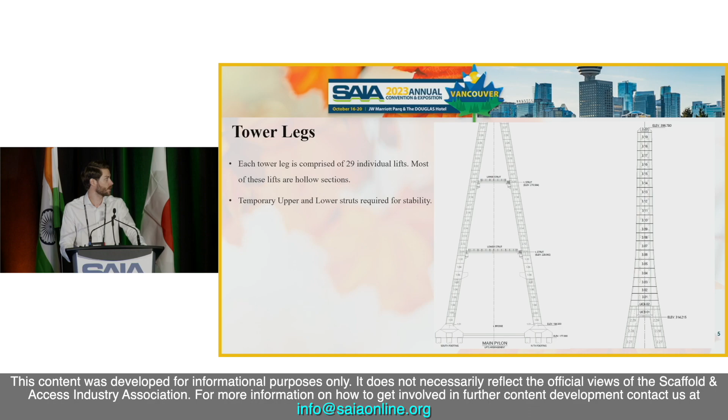So as you could imagine with the bridge, the tower has given us the most significant access challenge. You can see here on the right-hand side, we've got the lower portion, which we call the tower legs. It comes with about 29 lifts of concrete, and then we've basically transitioned to the pylon head there for another 22 lifts. Most of the lifts are hollow in the pylon head. It's all steel anchor boxes, we call them, which is where the cable stays are anchored to the tower. And you'll also notice on the left-hand figure there, we've got what we call the temporary struts. Those basically just prevent the legs from falling in on each other.

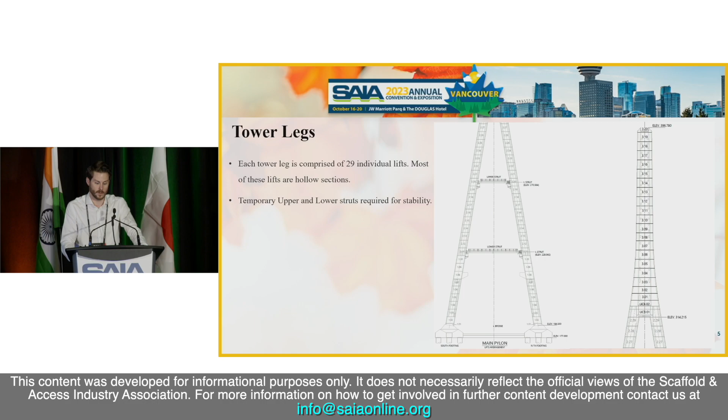On the U.S. side, it'll be 720 feet tall. So in the city of Windsor, it will be the tallest structure by far. And in the Detroit area, if anybody's familiar with Detroit, there's the Renaissance Center along the water, which is a pretty significant monument in the city of Detroit. The tallest building is also exactly 720 feet tall, so they are the exact same height.

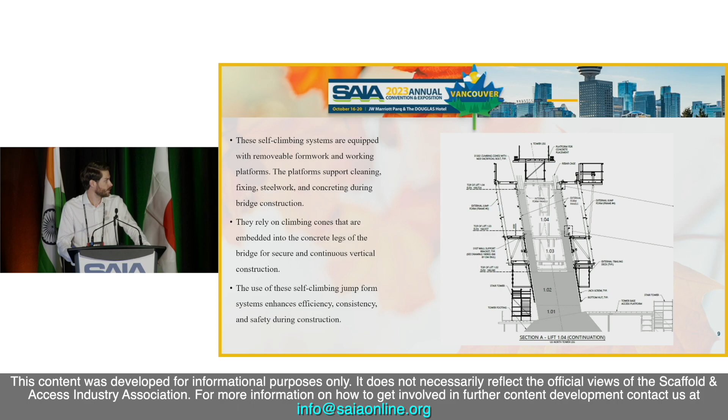So these things were designed and fabricated in Australia by OM Engineering. They've been great to work with. And you'll notice here, we had a unique challenge where we had independent and separate jump forms for each tower leg, which you can see on the right photos.

And then once we reached what we call the crotch of the tower at the top of the legs, that's where we had to merge the jump form. So there's a lot of steel work involved there in order to do that. But we got it done, and it worked out well. So these jump forms provide a very significant access point to where the majority of the work's going on in the towers. So we've got a bit of a video here. I'll show you some drone footage of the jump forms over the years.

How does it jump? So there's jacks basically all on the bottom, and they grab onto a threaded rod that's hooked onto some embeds in the concrete, and it basically jacks on the threaded rod and pulls it up, and then you replace those on the top of the next lift once it's cast with concrete, and just on and on. Yeah.

How much time for one pylon all the way? I was wondering how much time it took from the start of the pylon to, you said the U.S. side was completed. Yeah. So we installed the jump forms on the U.S. side in February, must have been 2021. And they just finished last month. So almost 3 years? Getting close, 2.5. Yeah.

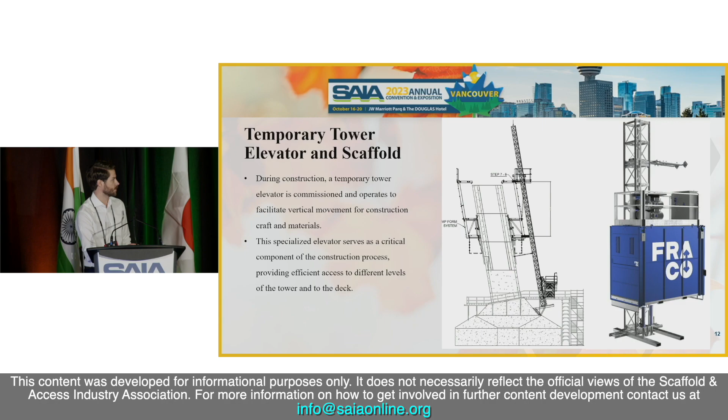So they provided the temporary elevator for us, and there's a few unique items related to this elevator in our tower that are of note. This particular elevator is Fraco's SEH model, and it's got, I think, 6,000 pound capacity, which is about 30 people. So it's pretty big.

And you can see here, one of the questions I believe from Eric was just how much this thing jumps, or how long the tower's taken. And we talked about this thing jumping automatically. So as you can imagine, the elevator and the mast are going to be stationary.

And as this jump form jumps and begins to move up, we've got what Fraco's design calls rolling ties, which is a very unique and cool feature. So basically it ties the elevator to the jump form and locks up. And then we'll move to this one here. This is a little bit of a shot on the rolling ties.

Once the tower jump forms are done jumping, we basically lock the rolling ties and continue to extend the elevator and move on to the next lift. So it's all pretty standardized, and the sequence, obviously at this point, U.S. tower's done, but Canadian side, we're cruising along, and everything's moving along very, very smoothly. So just go back here for a second.

The elevator does land at the very top of the jump forms. So that's the top landing, and obviously once the tower's complete, it will land at the top platform. But there are 3 other landings, including the actual bottom and base. We also have a landing at the deck level, and then there's also one at the crotch where we've got what we call platform 5. So that's one of the items that'll be coming up as well.

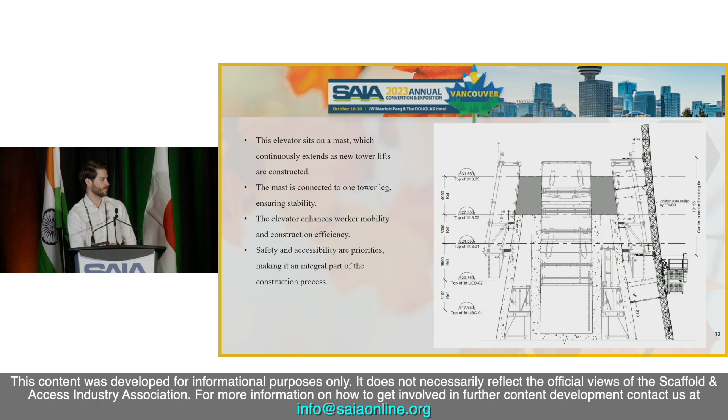One of the other unique design features that we took advantage of on the Canadian side, at least, was integrating our concrete slick line into the elevator mast. So one of the questions that I get a lot is, how do you get the concrete up to the top of the tower, right?

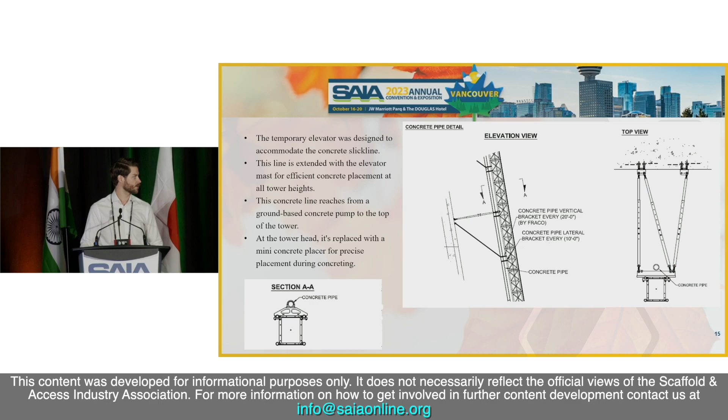So in this case, on both sides, we've got a massive stationary pump that's at ground level. It's got a hopper, concrete trucks just back in, unload the concrete into the hopper, and then this pump pumps the concrete all the way up through this concrete pipe, and it gets distributed into the particular lift with what we call a mini placer. It's like a reciprocating arm. But on the Canadian side, we were able to integrate the concrete pipe into the actual elevator mast, which is pretty unique.

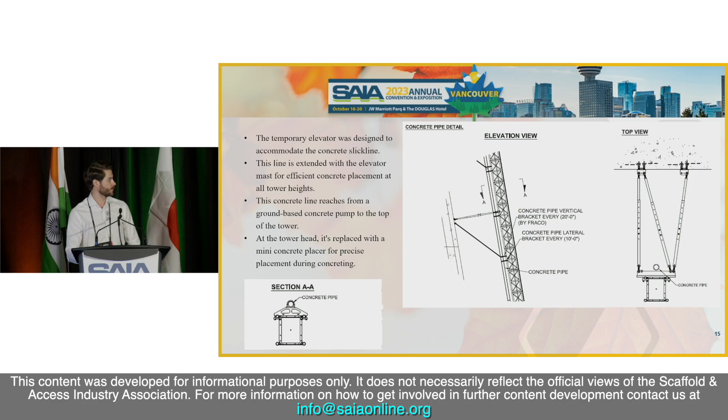So I've got another video here which will show you a little bit more on the elevators. So it's similar, it's just not integrated with the elevator itself. So they had to do separate embedments, separate ties from the concrete pipe right to the tower. So it's completely independent of the mast, but very similar concept. We were just able to utilize the mast itself for support, which made it a little bit more efficient.

This is work. Hey, I'm sorry. You mentioned the crotch a couple of times. That's where the two legs come together? Yeah, the crotch. The crotch, okay. Yeah, I thought that's where the legs come together. That's right. Well, the formwork kind of crashes into each other right there. That's true. It does crash into each other as well.

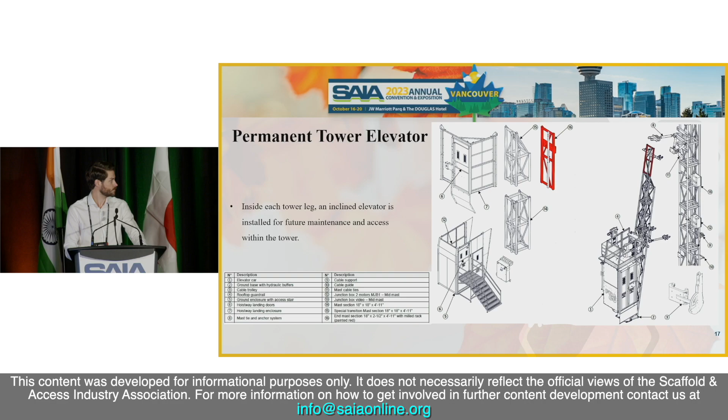So there are a number of different platforms in the pylon head. The elevator will only stop at the second from top, which is where the last cable stay is, and also at the very first cable stay, and then obviously at the bottom too. So there are only basically 3 landing spots for the vertical elevator as well.

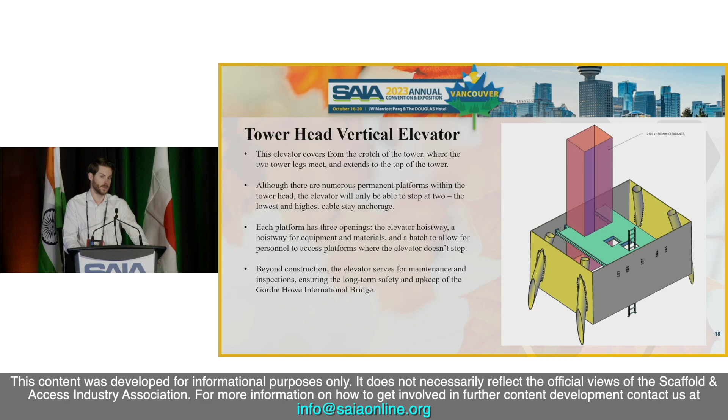There's like a little overhead crane at the top of the tower that'll always be there, and people will be able to bring materials up to each level through that access hatch.

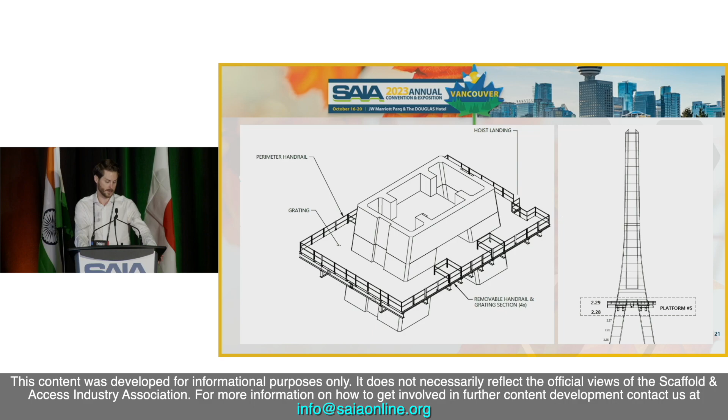So here's a little bit more of a figure on the platform 5. It does provide access around the entire tower system, in between the legs as well and around. So like I said, this provides critical access and material storage for the stay cables. All the good things are up there, the sea cans, and obviously the important porta-johns.

So I've got another video here. It gives you a little bit of a better view on the platform 5, and I think at the end it'll have the scaffolding and the mast climber there.

One of the questions I have is that red platform there, that looks like it's just made of structural steel? Yeah, that's right. Okay.

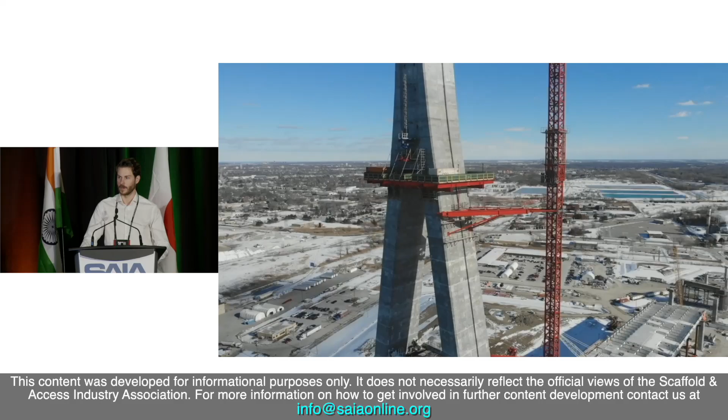And Jay, did you have a team that was working on the U.S. and the Canadian side, or how did that dynamic work between Canada and the U.S., building a bridge together between two different countries? Yeah, that's a great question. We basically do have 2 separate teams. Obviously, the bridge is more or less symmetrical, so we do work very closely together, of course. But we do have different engineers from across the world, especially our lead engineers, that have different opinions and different preferences and things like that. So we do things slightly different depending on what's going on.

But yeah, there's one team on the U.S. side, one on the Canadian side. Myself personally, because I'm in the office, I run all the office stuff in the engineering department. I cover both bridges, U.S. and Canadian. But as it relates to the construction teams, they are separate.

And who was doing the construction on the U.S. side and who's doing the construction on the Canadian side? So we've got a bit of a unique setup.

The joint venture general contractor that's designing, building, and ultimately delivering the project is called Bridging North America, which is a joint venture between Fluor, Dragados, and Aecon. On the Canadian side, we're BNA Canada, BNA Constructors Canada, GP. On the U.S. side, it's BNA US JV. Basically, we're all Bridging North America.

All the employees are hired and employed by the three parent companies, but technically BNA US JV is a subcontractor to BNA Canada, so they basically run all their stuff through BNA Canada. The headquarters—our project director and all the lead staff, our senior leadership team—is located in Canada. But on the bridge team at least, we're self-performing most of the work, so very little of it is actually subcontracted out for the actual work on site.

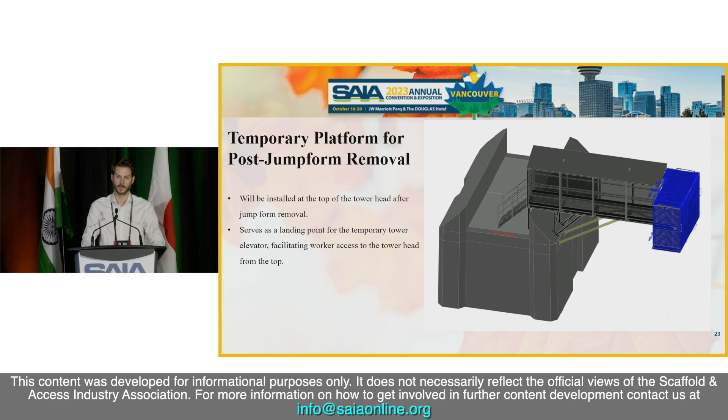For some of the other segments, like the ports of entry, the large majority is subcontracted. The U.S. port of entry is completely subcontracted, and same with the Canadian port of entry. The I-75 portion is more self-performed, similar to the bridge. But the bridge team does self-perform the large majority of the work.

I mentioned in one of the pictures, it also showed the very, very top of the tower platform. The picture at the time showed the completion of the U.S. tower, so this is the design for that. This is where the temporary elevator will also land. The U.S. side has it complete, and the Canadian side will have it soon.

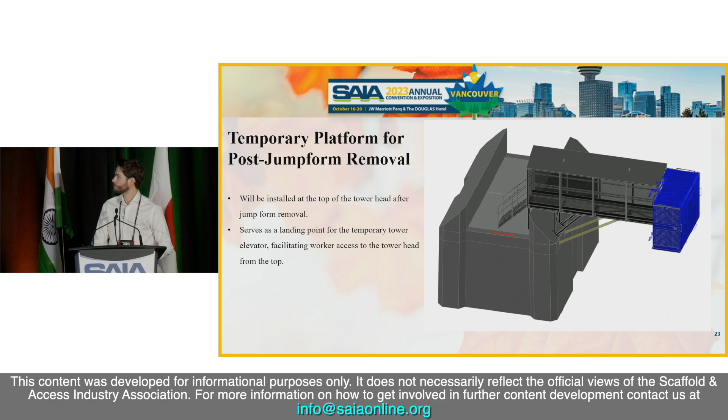Now we get into the mast climber. This is provided by Climber—not sure if they're present at today's conference or not—but they did provide this to both sides. We've got two on each tower, one on each face of the tower where the stay cables are coming out.

It is a pretty cool mast climber. It's modular, so there's a bunch of different platforms that flip up in order for the platform to actually travel vertically in between the stay cables, and also have these platforms fold out on the sides in order to gain access to all sides of the stay cables.

So it's a pretty interesting piece of equipment, and somewhat similar to the temporary elevator. Whenever we jump the tower jump forms, this follows closely behind, extending the mast as we go up with the concrete lifts.

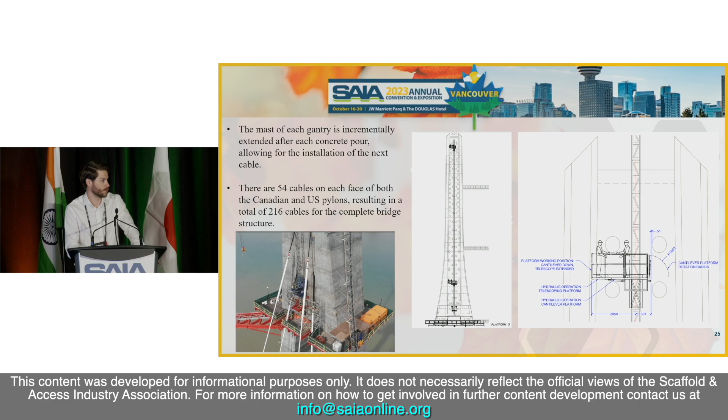Another noteworthy item: for the entire bridge, both towers, we've got 216 cables total, so there's 54 on each face, which is what one mast climber is used to help install on the exterior face of the tower.

Here's some more photos of the mast climber. In addition to platform 5 there at the crotch, there's also some scaffolding you'll notice that provides the access from the platform up to the actual mast climber. That's obviously a pretty critical piece of access in order for stay cable installation to continue. All three of those photos basically show just different views of that.

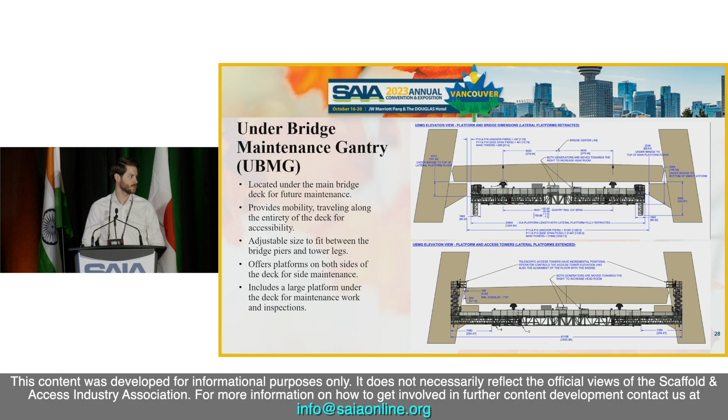If you imagine flipping these views around 90 degrees, looking at just the tower legs behind each other, the bridge can also move longitudinally. On the US side we have disc bearings as well, longitudinal - brackets come off the superstructure and bear on the corbels. On the Canadian side we don't have bearings, we have lockup devices, also called shock transmission units. In a major wind event or earthquake those lock up, and under normal service they just allow thermal expansion and contraction of the bridge.

You mentioned the bridge turnover. Is there some sort of approximate date on bridge turnover? There is, I don't know how much I can say. I'm sure everyone can imagine, we started construction in 2018, has spanned through the entire pandemic, right? So there's a lot of legal things that go into that because we're working for the Canadian government. So that's never that great.

But, basically, maybe an unofficial date. Our contract says November 2024. We're probably something like 6 months delayed. So we're working on getting that through a change order with the client all ironed out. We're getting close, but it'll be into 2025 for sure at this point.

Will it have a wind limit like the Mackinac Bridge? No, there will not be a wind limit.

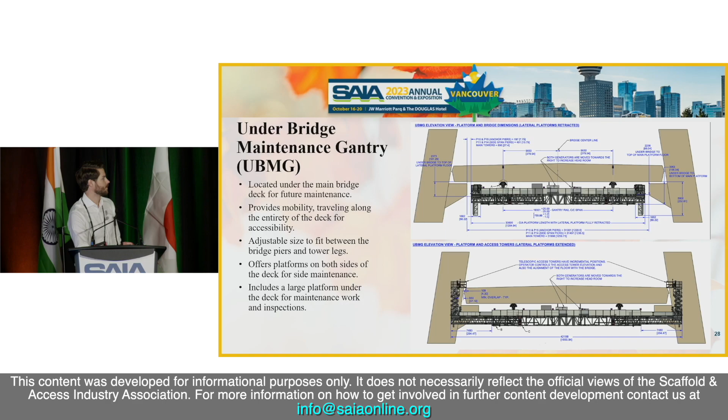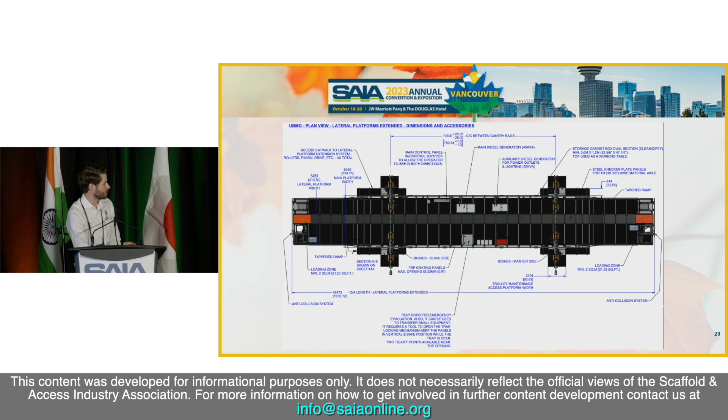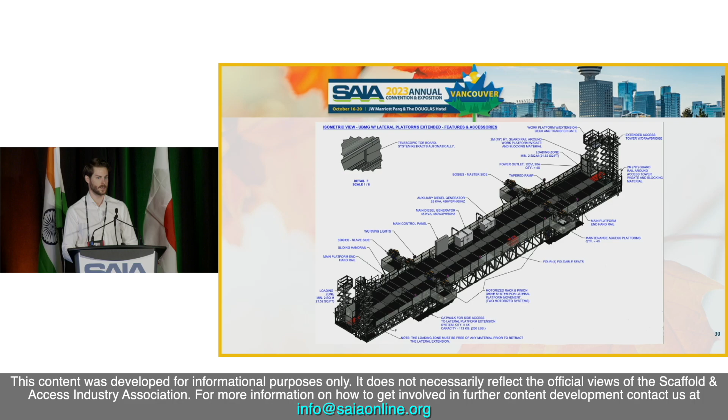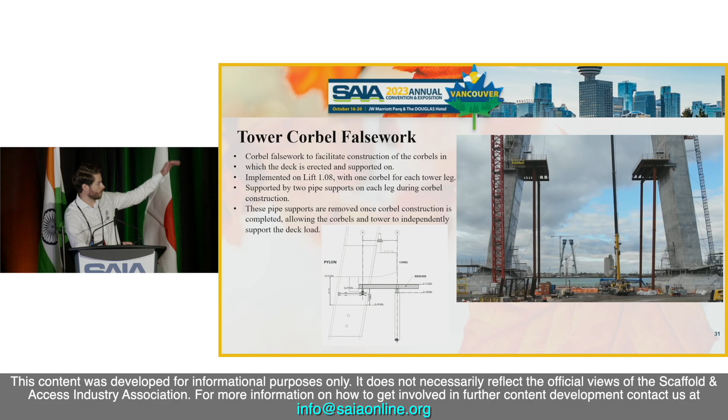So the next item here, I mentioned the corbels a couple times. That's what, as I mentioned, the bridge superstructure and deck bears on for each tower. So in order to construct those, we obviously built the tower legs, went well past that, and we implemented this falsework system to provide access to the areas where we needed to begin doing the rebar and concreting of the corbels.

So this was a pretty interesting design, but unfortunately there's no other access to these things other than climbing up ladders and platforms within the tower legs. So yeah, it's never fun having to do that. There's many times where we have inspections on both sides too, and you have to climb down, climb up the next one. So I'm happy to be done with that part of it, that's for sure.

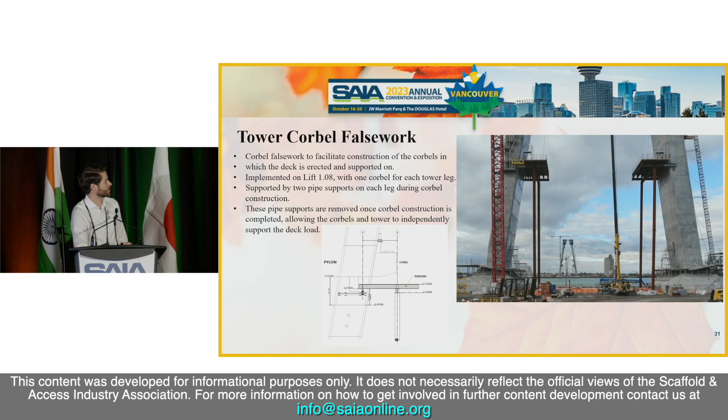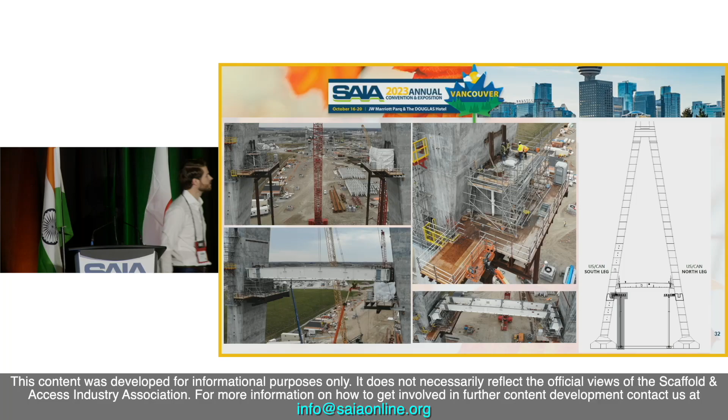Here's some more photos. The first one there on the left shows some scaffolding on the corbel falsework. This was all set up. I think the corbel is in that photo. It looks like it is.

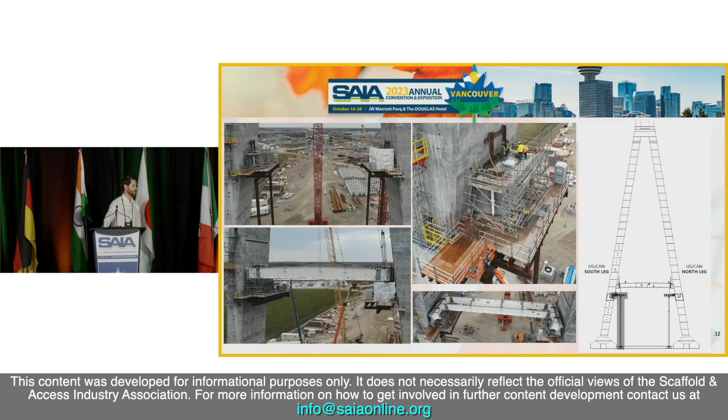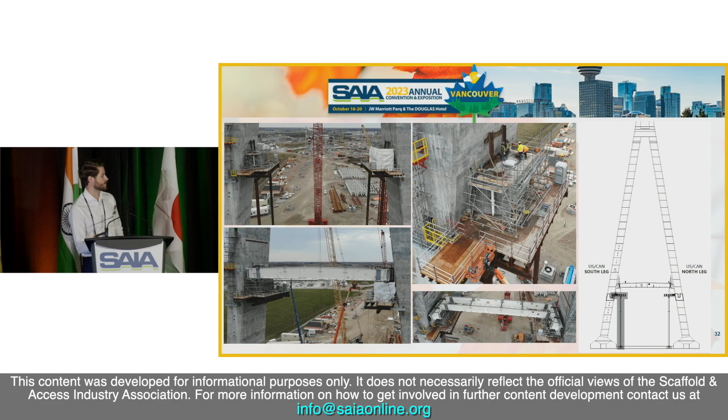Yeah, so Eric, you asked about the vertical bearing. So that's the scaffolding system that was set up in order to install that. And then you can see the bottom two photos, or actually the top right photo, you can actually see the bearing is actually installed there. And then the PTFE sliding material is protected. And then on the bottom two photos, you'll see what we call the pier table erection, which was the very first primary pieces of structural steel to be placed. The floor beams, first few girders, things like that. So those are all locked in place and on top of the bearings, and that's how we started on each tower.